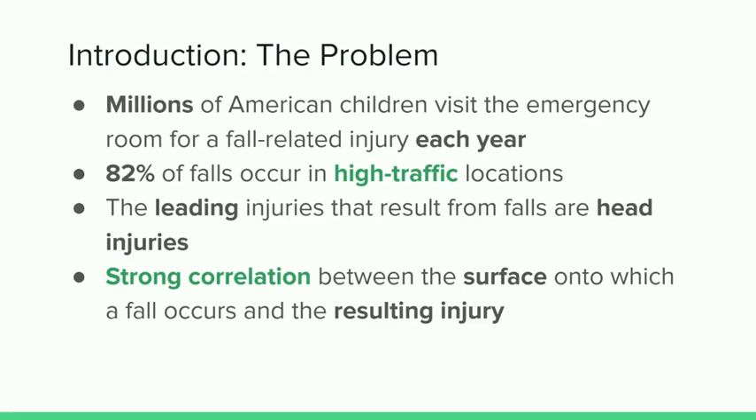Several studies have also found that there's a correlation between the surface onto which a fall occurs and the resulting injury from that fall. However, no study has yet proposed a scientifically rigorous method to test different flooring materials and their ability to decrease head injury severity. Therefore, that's exactly what this study did.

Vinyl sheet, luxury vinyl tile, which is also called LVT, vinyl composite tile, which is also called VCT, and linoleum were chosen as the four experimental groups because they are the most common flooring materials used in high traffic areas.

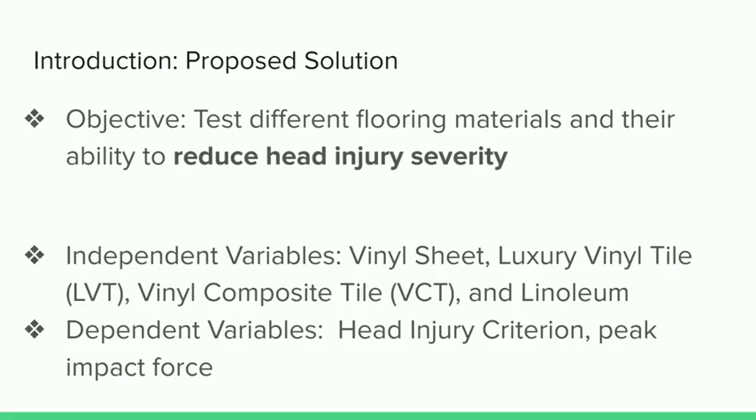The main research hypothesis of this study was that vinyl sheet would be the best flooring material to increase total collision time and therefore decrease head injury severity, by decreasing head injury criterion and peak impact force. I also made two predictions.

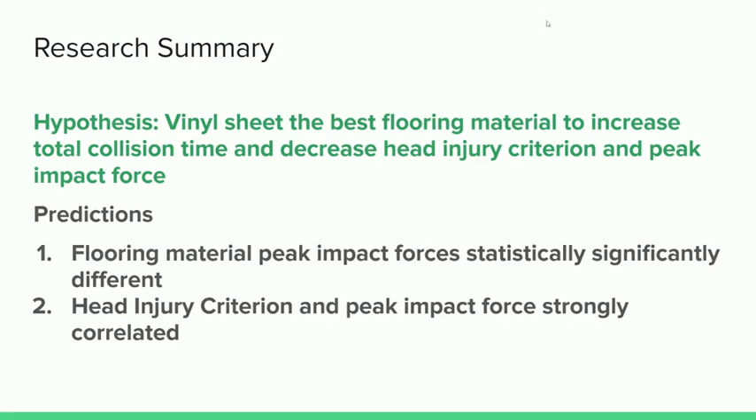The first one was that the flooring materials' peak impact forces would be statistically significantly different from each other and from the baseline. I also predicted that head injury criterion and peak impact force would be strongly correlated. I utilized two methods to test these hypotheses.

In the first method, peak impact force generated by 50 collisions on each flooring material was recorded. Peak impact force, also called Fmax, is the highest recorded force in a collision. Scientists have found that decreasing Fmax reduces fall related injury severity.

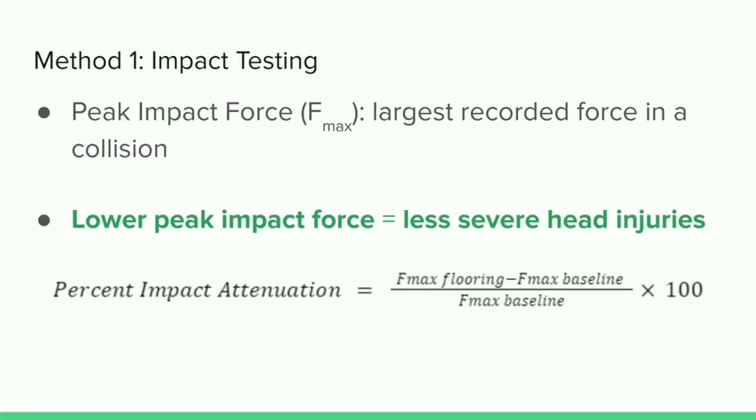To compare how much each flooring material decreases Fmax, percent impact attenuation was calculated. This equation is significant because it allows someone to find out how much a material decreases the force generated on impact in comparison to an impact with no material, which is also called the baseline measurement.

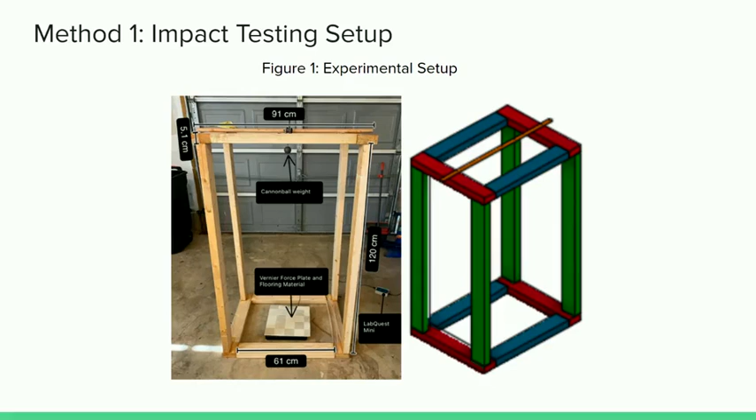I coated the anthropomorphic heads in a chemical called Ecoflex to simulate the viscoelastic and compressive properties of human skin, and I also added modeling clay in the inside of this anthropomorphic head to closely model the features of the brain and inside the head.

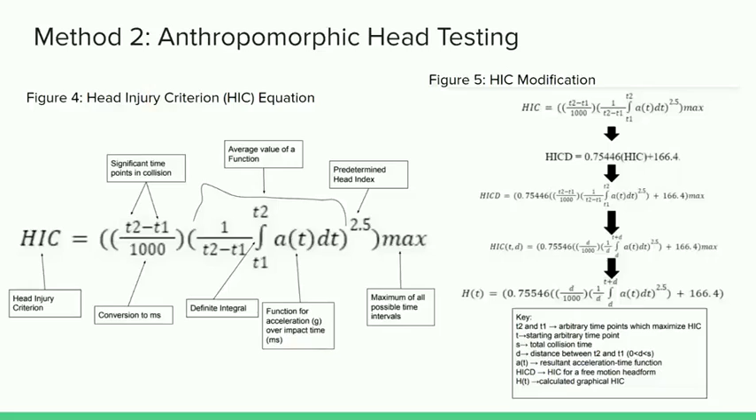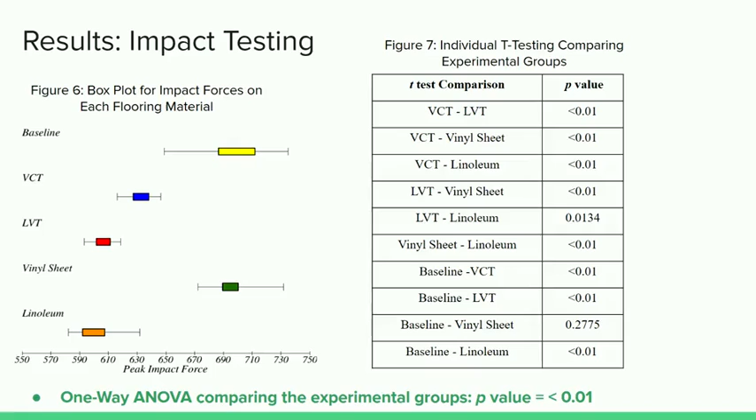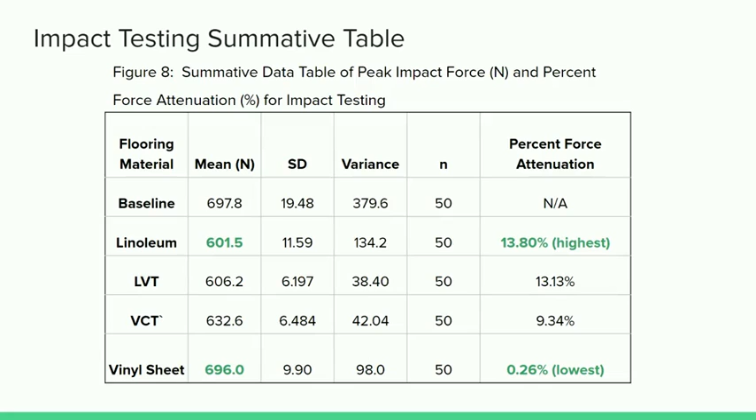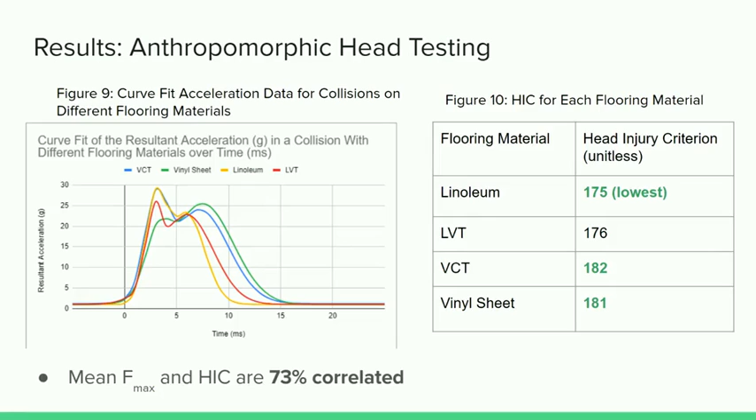For the anthropomorphic head testing, raw data was converted into a graph of the resultant acceleration of the head over the collision time. As seen in Figure 9, the raw data was curve fit in order to be compatible with the HIC calculation. As you can see in Figure 10, linoleum had the lowest HIC at 175, while VCT and vinyl sheet had the highest HIC at 182 and 181. There was a calculated 72.75% correlation between the mean Fmax and HIC results.

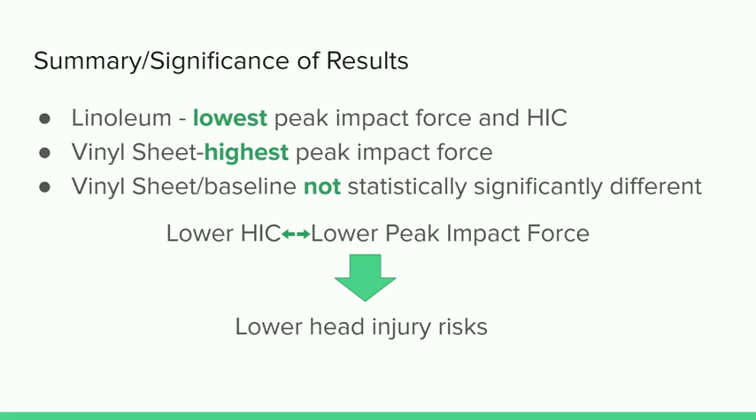As you saw in the results, linoleum had the lowest peak impact force and HIC, while vinyl sheet had the highest peak impact force. Furthermore, peak impact force for vinyl sheet and the baseline was not statistically significantly different. I made a little table on the bottom of the screen. You can see that a lower HIC score is correlated with a lower peak impact score, which together are correlated with a lower head injury risk.

So let's go back to the hypothesis. My first hypothesis was that vinyl sheet would be the best flooring material. However, linoleum was actually the best flooring material because it had the lowest HIC and lowest peak impact force.

Now, my first prediction was that there would be a statistically significant difference between the flooring materials' peak impact forces and the peak impact forces compared to the baseline. Now, this may be true, and there was a statistically significant difference between all the flooring materials' peak impact force, and them compared to the baseline, except for the comparison of the baseline and the vinyl sheet. So we're going to give this an X and a check.

My second prediction was that there would be a strong correlation between the two dependent variables, HIC and mean Fmax. And there was a 72.75% correlation between the results of both methods.

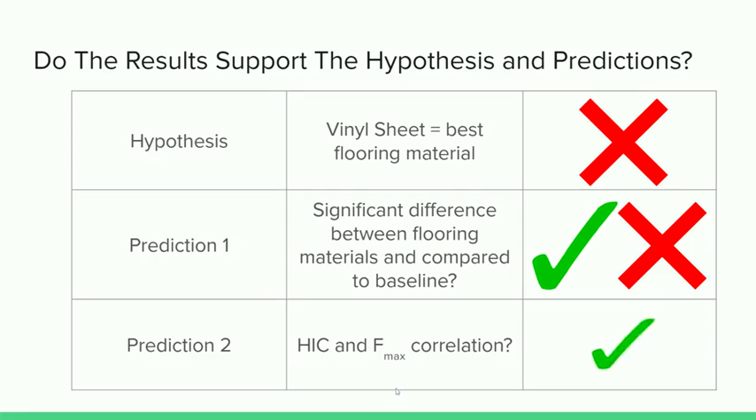So, in conclusion, linoleum is the best flooring material to decrease peak impact force and decrease head injury severity resulting from a fall. On the other hand, vinyl sheet will not significantly decrease head injury severity resulting from a fall, as there was no statistically significant difference between its mean Fmax and the mean Fmax of the baseline. Furthermore, HIC and mean Fmax are highly correlated, which reinforced the validity of the data and proved that these methods were effective.

Some limitations that may have affected the results of the study are that HIC had to be estimated by curve fitting because exact computation takes a long time, and time was limited. Furthermore, the number of trials for the anthropomorphic head testing had to be limited to one because the anthropomorphic heads could not withstand several impacts. There was damage on the anthropomorphic heads after only a few impacts. Furthermore, the anthropomorphic heads were very costly and took a lot of time, so I could not 3D print them very quickly, and therefore I could not print several heads.

Future research is needed to calculate what properties of linoleum allowed it to perform the best in the current study. Furthermore, the methodology of this study should be replicated in order to validate the methodology that I propose. It's hoped that new standards in flooring material testing based on these methods can be established in order to minimize the millions of injuries in children caused by falls each year.